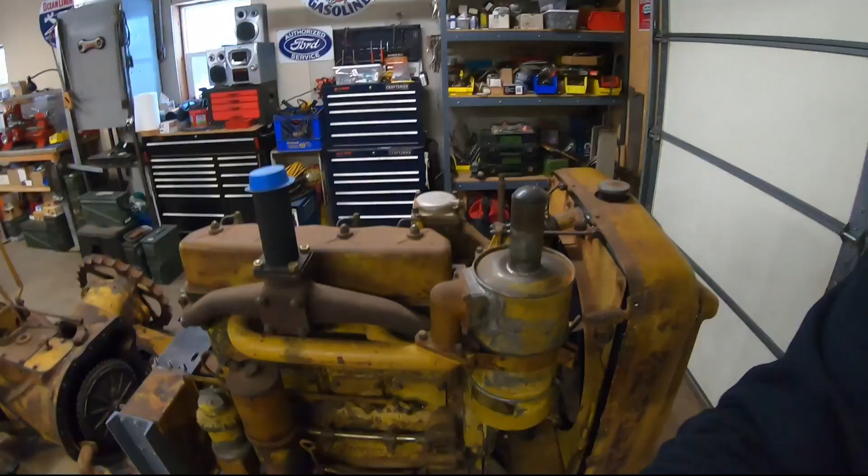We're going to put the starting engine on today. That's right. Finally going to get that done. You can see I've started loading some of the base studs in place. We have the 3 done over here, and I still have to do 3 over here.

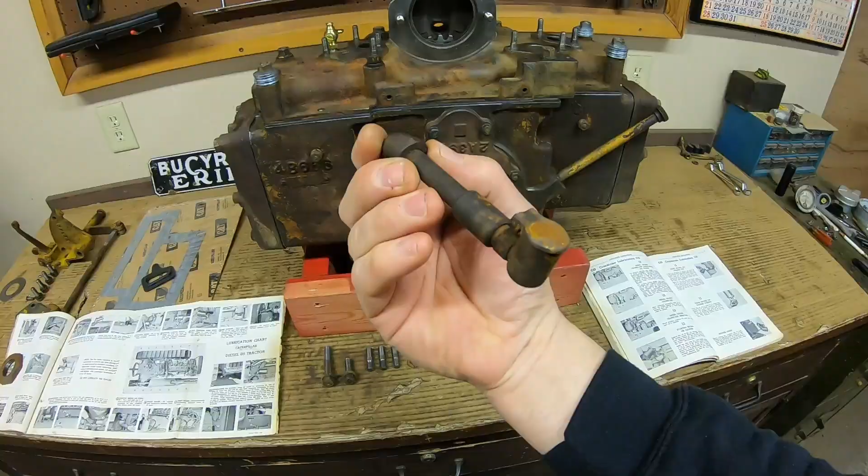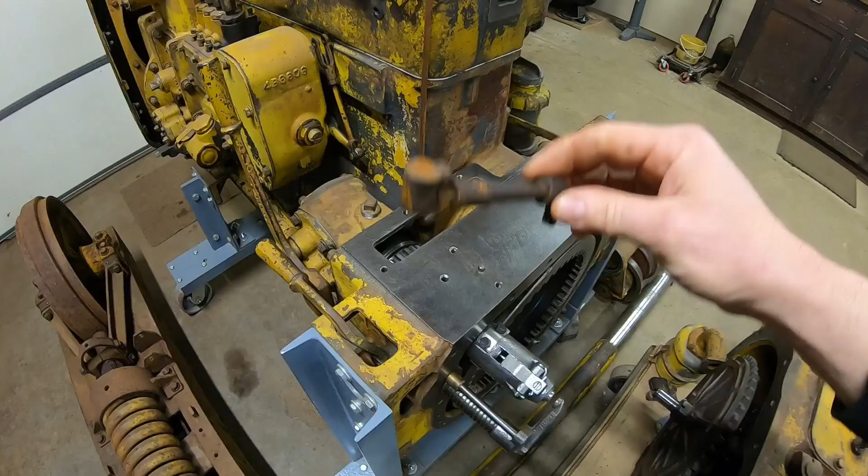But, well, before I can put the other 3 base studs into the bell housing, I have to address this detail item first. It's a really cool first generation piece. With 1113 being such an early tractor, it could have been eliminated through the years, but it was still in place. So it goes right in that open hole right there. And it's just an oil cup with some piping that is meant to carry oil to the pinion and ring gear where they mesh, lubricate, all that stuff.

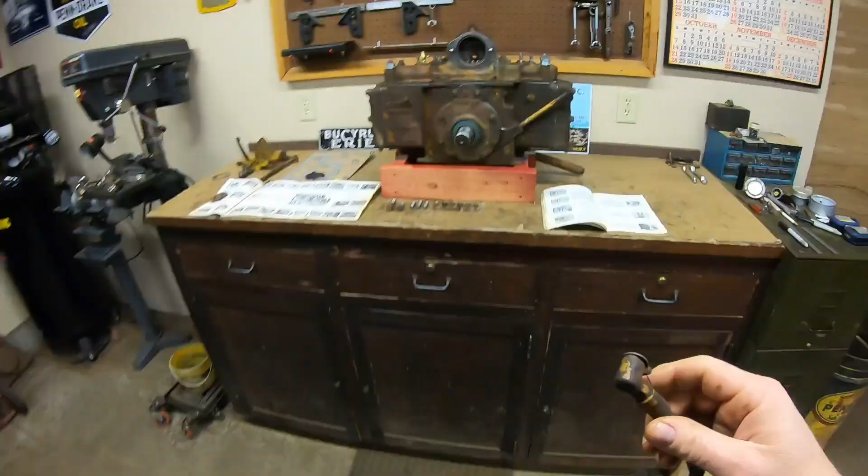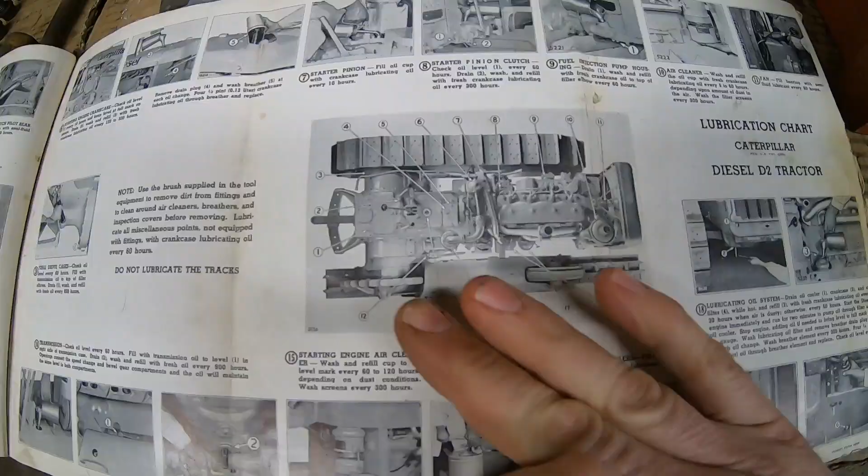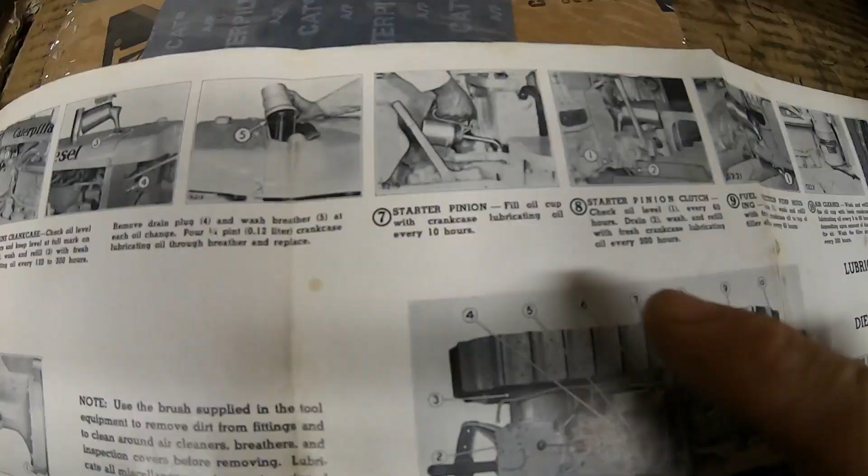And I'll show you in the manuals I have laid out on the bench here. Early Caterpillar D2, 3J1, 5J1, and up operator's manual right here. We have the full lubrication chart fold out. We have the overhead view of the machine. We want to look at item number 7, which is starter pinion. You can see that small little oil cup right there, maybe just at the base of the starting engine. It says, fill oil cup with crankcase lubricating oil every 10 hours. So that is the piece in question right here.

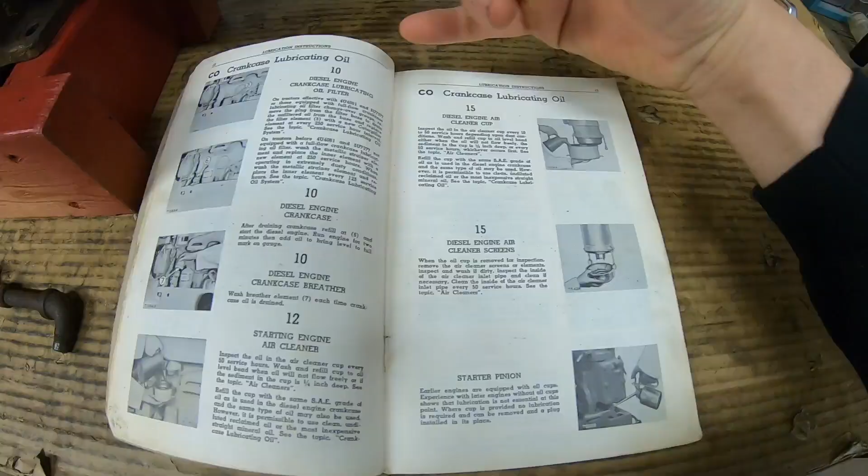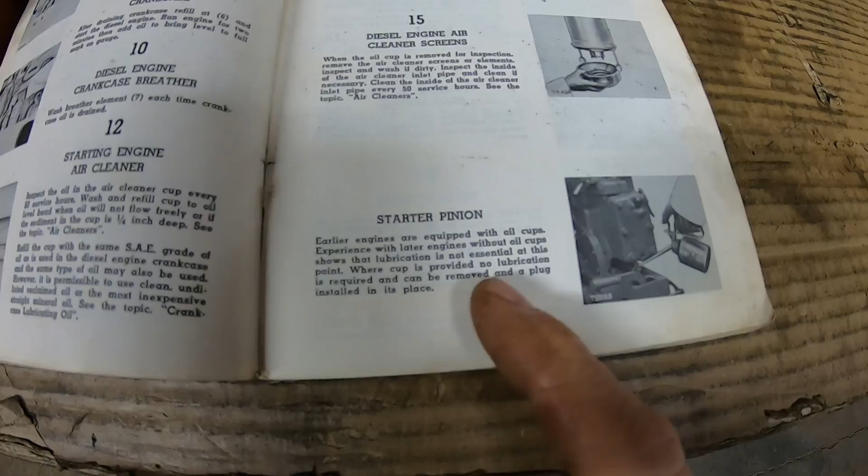What makes that such a cool piece to still have now, though, is when we go into the later Caterpillar D2 U-Series Operator's Manual, they don't even have an hour interval for it in here because, well, we just have a brief note, starter pinion. You can see we're adding oil to that little cup with the piping and everything down there. And it just says, earlier engines are equipped with oil cups. Experience with later engines without oil cups shows that lubrication is not essential at this point. Where cup is provided, no lubrication is required and can be removed and a plug installed in its place.

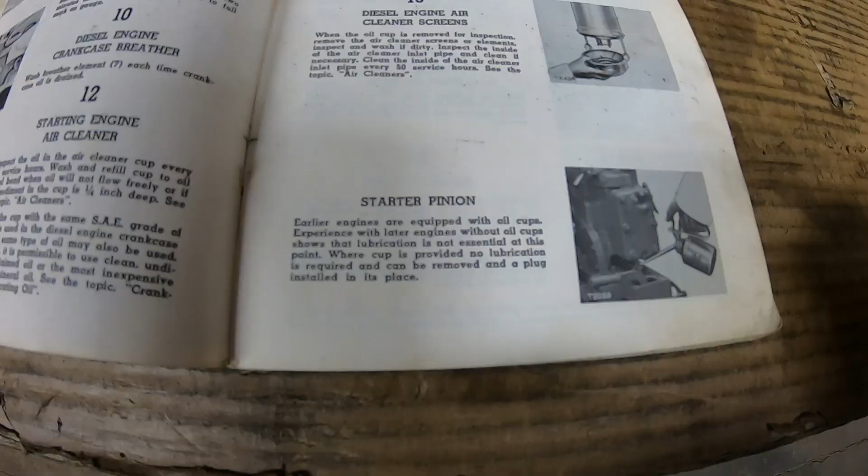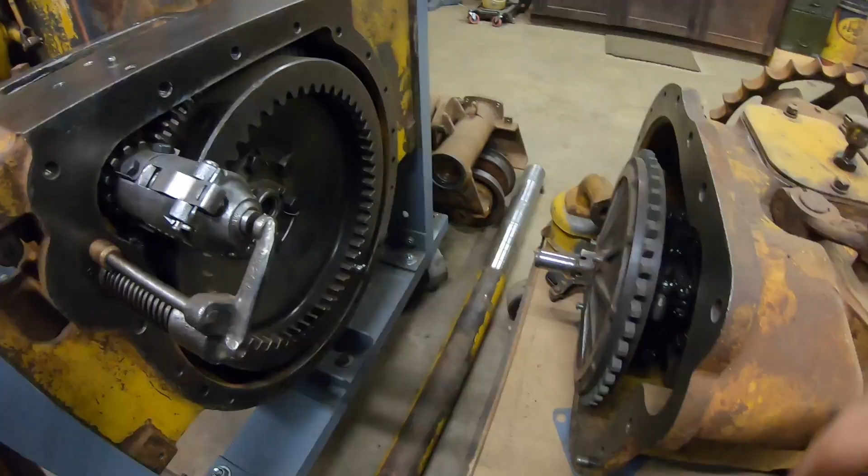So, do you think for a minute I'm going to just eliminate this with a pipe plug? No. We're keeping that in place, but at the same time, I'm also not going to be adding any oil to it because, well, we have the clutch in the flywheel in the same compartment, all the dust being generated from that, and to make a long story short, they learned that having all that oil on all those gear teeth just made more debris stick to them, and those gears ran dirtier with oil on them and wore out faster than if they would have just left them dry. So yeah, we're going to let them run dry, of course, but we need to have something there too.

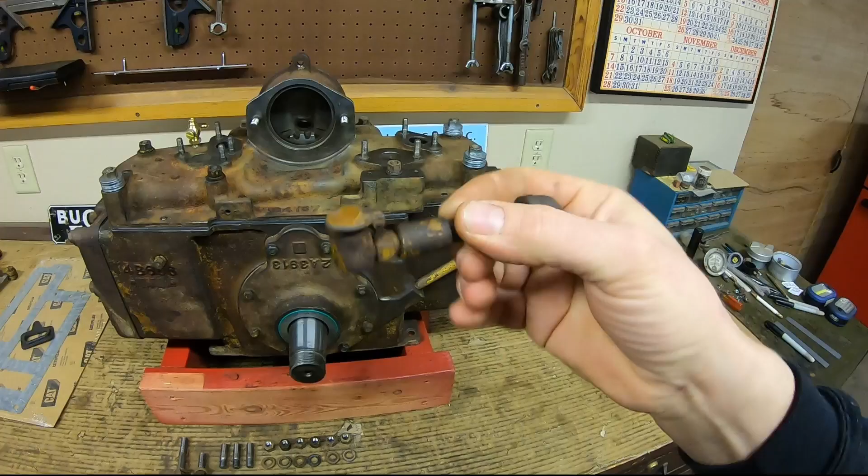And everything was moving along great until I went to clean it out, and I opened the cap just a little too far, and because that spring is rusty, it broke. So now that cap just flops. Oh, darn it. Of course, it was really rusty and poor condition, so it's best that it breaks now. We can do something about it. So, all right. So, we'll do what any other rational person would do.

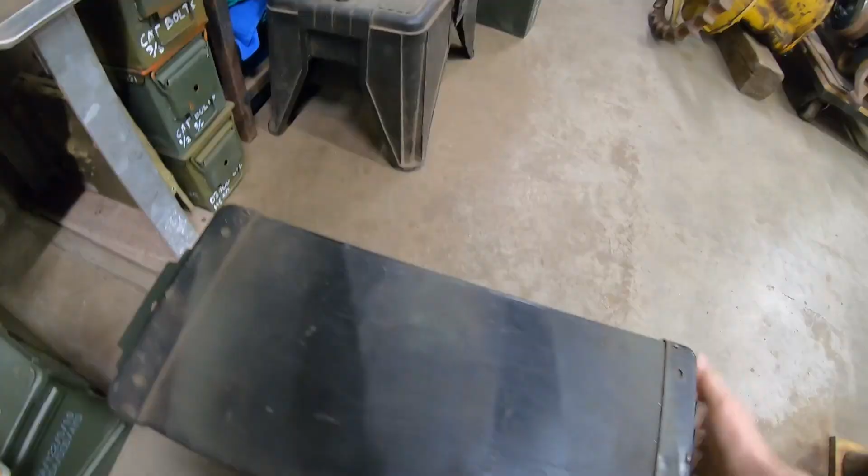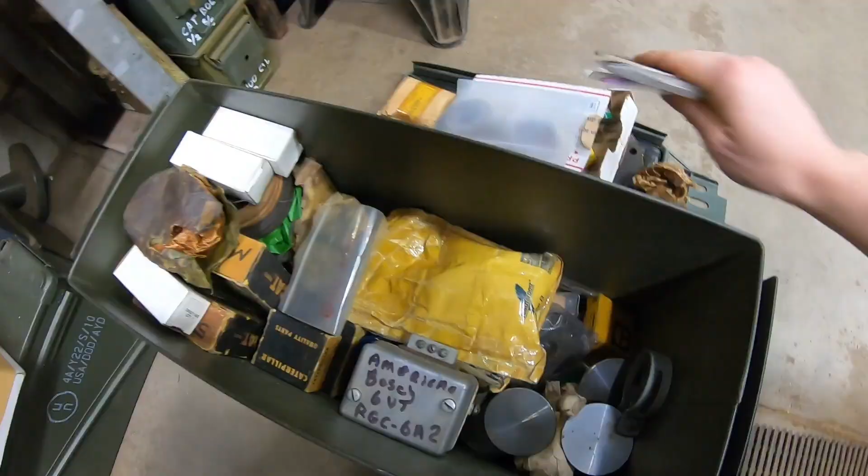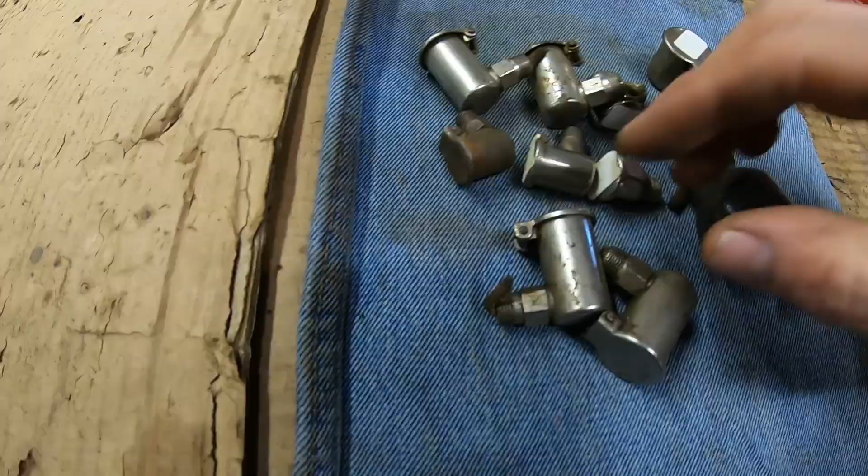Bust into our new old stock stash. Might have to dig down a little bit, find it. Nope. Not in there. Not in there. There we go. See if we can find a new one. Yeah.

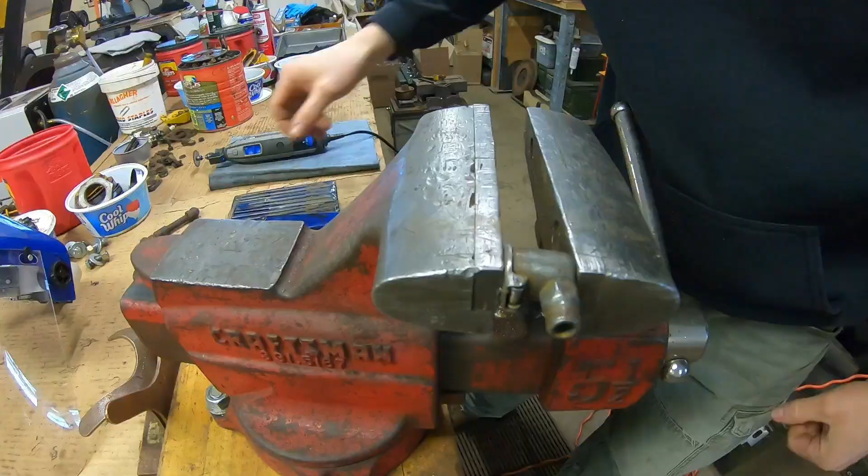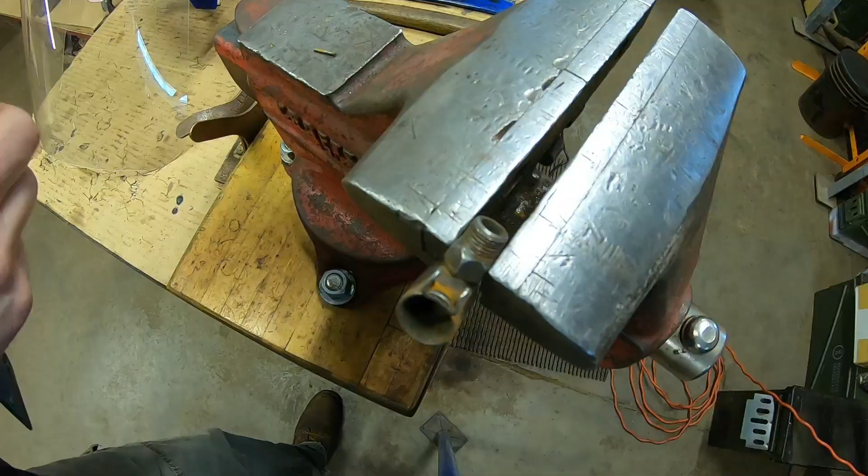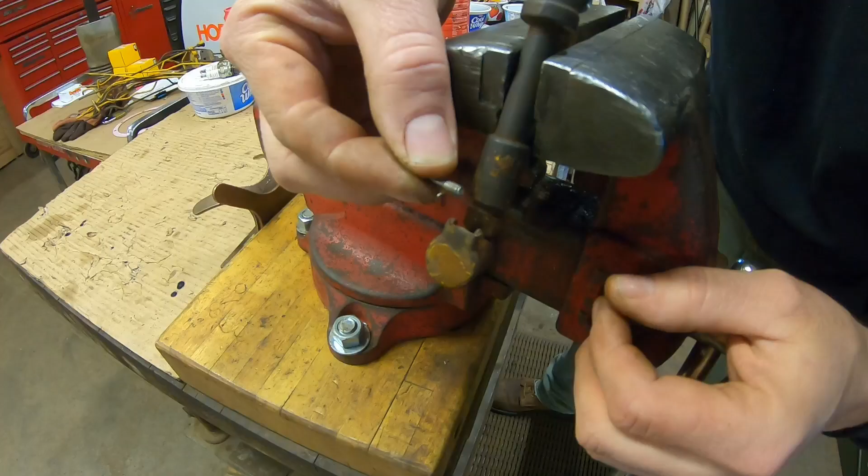Dremel off the peened over end of the pin. Pull it out. Get the spring. Do the same to the old one. There's part of the spring. There's the other half. Old cap back on the old cup. Drop the spring in place. Compress it. And because you were careful with the Dremel, you've got just enough of the old pin left to reuse again.

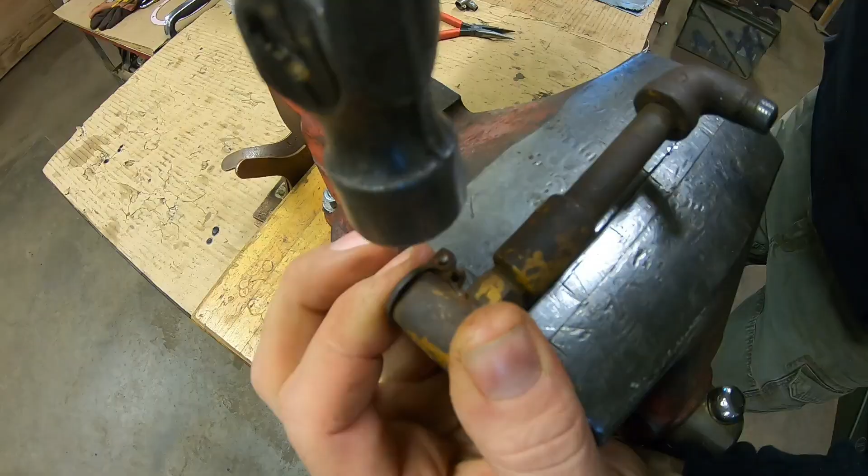There, peening the end of it over so it can't drift out. Return triumphantly to the bell housing. Start the threads. Achieve final position and verify the auto closing nature of the cap with patina still intact. As I said, like any other rational person would do, right? I mean, we worked harder to save this.

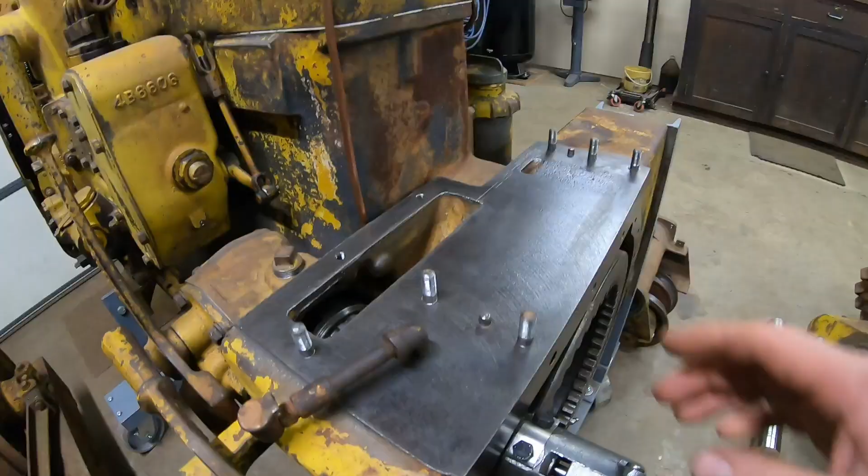All right, now that we don't have to spin this around and around anymore, I got the other 3 base studs put in. And guys, Squatch is going to get a little bit preachy right here, but you definitely want to chase these threads on the studs, on the nuts that go onto them. Anything that has to do, well, I chase threads for everything anyway, but anything that has to do, especially with these starting engine bases, good clean threads is a must,

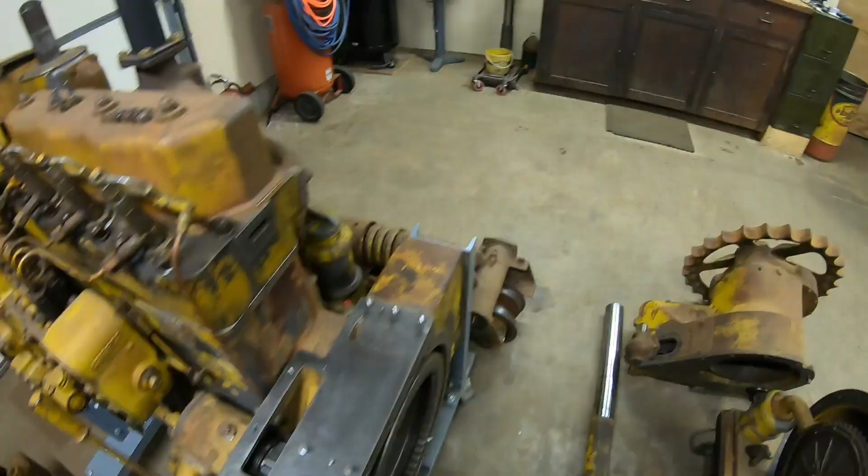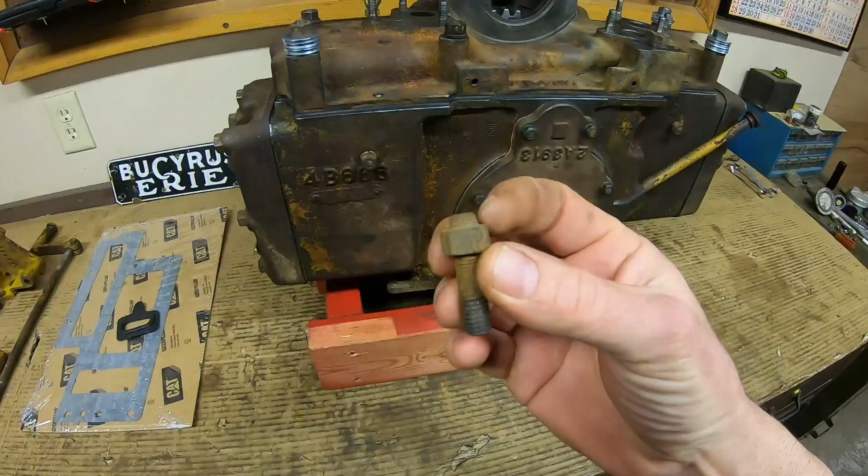because once you get this set on there, you're going to be working underneath the cylinders and the water jackets, and having this first generation oil cup with piping and everything that I'm so proud of, that's going to even further lock me out of this one for access. And you just really want to, I mean, taps and dies are not that expensive, and they can make life so much easier. So what happens a lot of times, and I've seen people struggle with it, you'll get a scenario like this where these things are old and rusty and the nut will stay on the stud.

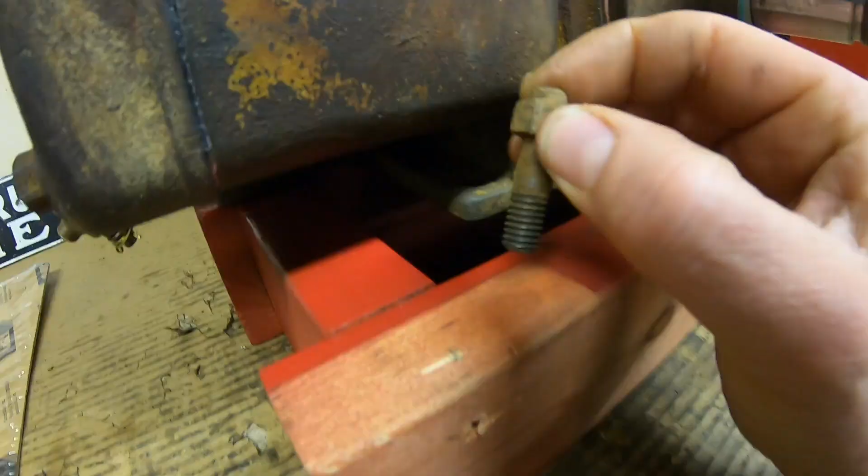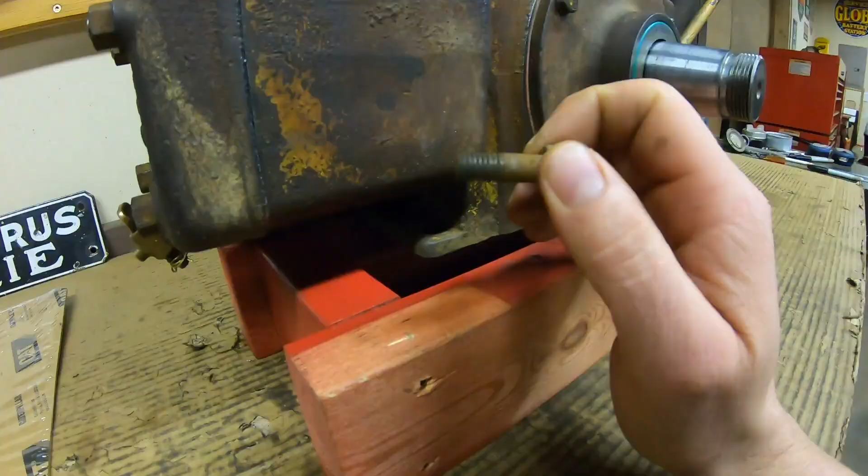And when you go to loosen this, working in underneath here, the stud will turn out of the bell housing, but the nut and everything is on it. And because it's so tight under here, it'll stay captured in the bolt hole and you can't get it out. And I've actually seen guys clean the whole base and everything and leave that in there, and then when they set this back down, they're trying to start those coarse threads back into the bell housing, and then they're fighting everything. Just take the time to get that rusted nut off the stud, even if you got to cut the stud to get it out, and start over with fresh, better hardware. I'm telling you guys, it's going to save you time and save you hassle in the long run.

And like I said, taps and dies are just such an essential part of the toolkit when working on these old machines, because when you have good clean threads, and you're going to see once I set that on, it's going to be real tough to get to this one. It's going to be tough to get to all 3 of those. All I need to do is start that nut, and then I can just go zing, zing, zing with like a fingertip, and it'll walk all the way down those threads until it hits the lock washer. And the only time I need to put a wrench on it is to compress the lock washer and get it tight against that base. So I got my rant out of the way.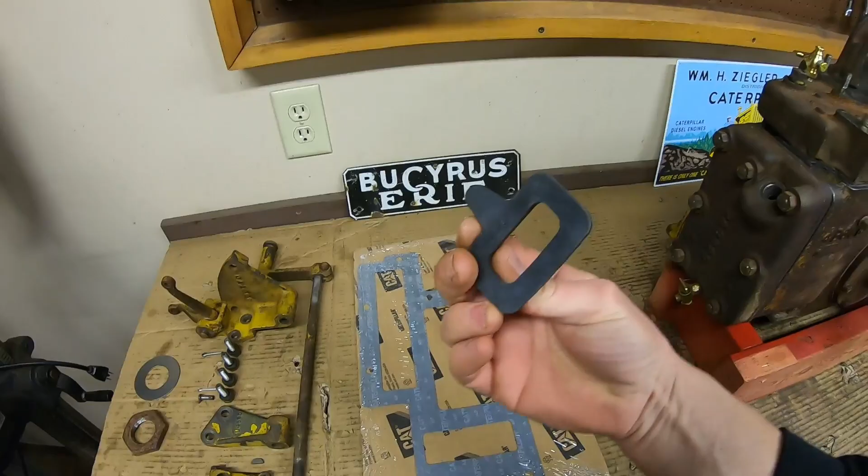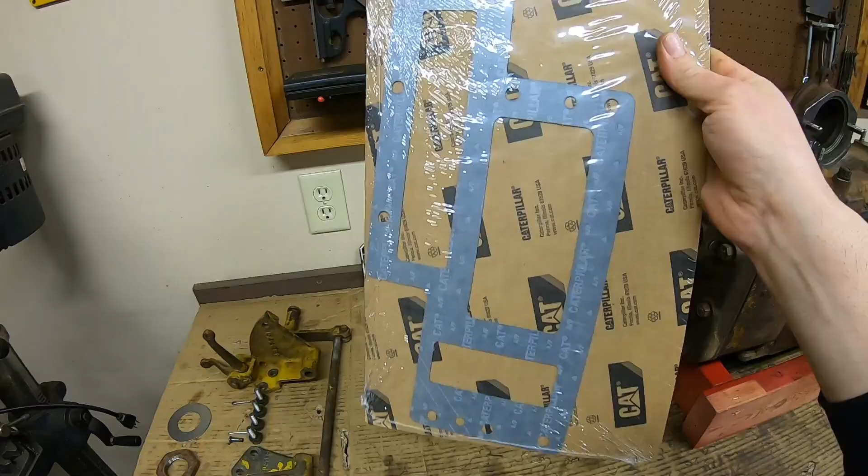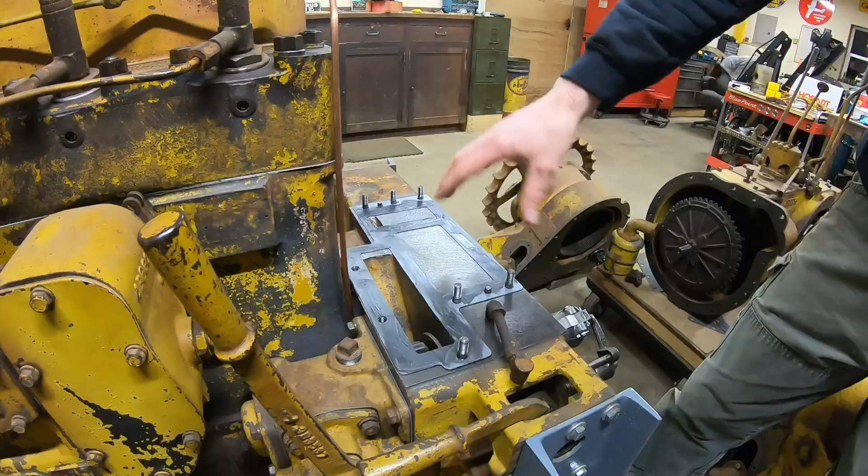Gasket time. You all are familiar with the top water outlet seal. We covered that last time. I did buy a new base gasket from Cat, even though I could have made it, and I can't even pick it up. Look at that. So anyhow, this is the new base gasket right here. Part number's 2A3483. Okay, everybody, get ready for some entertainment value here, because I've got the gasket in place. I've got goop on it because it's really heartbreaking when you have a coolant leak from that base. You just don't want to have to mess with any of that. So we've got that done. I also back up that rubber seal up here at the water outlet with some sealer as well.

But when I set the starting engine on, I'm here by myself. I don't have any help. So sometimes if you stack that idler gear tooth for tooth on top of the pinion clutch drum, pinion drive drum in here, then you have some trouble until you can get in here like with your leg and actually rotate that a little bit to get the mesh right, to get it to drop down. And then once it's on, I'll kick it back a little bit and then get that rubber seal put in there. Got a putty knife here for some help just in case. This is the only vantage point you're going to get of this, because it's just one of those jobs.

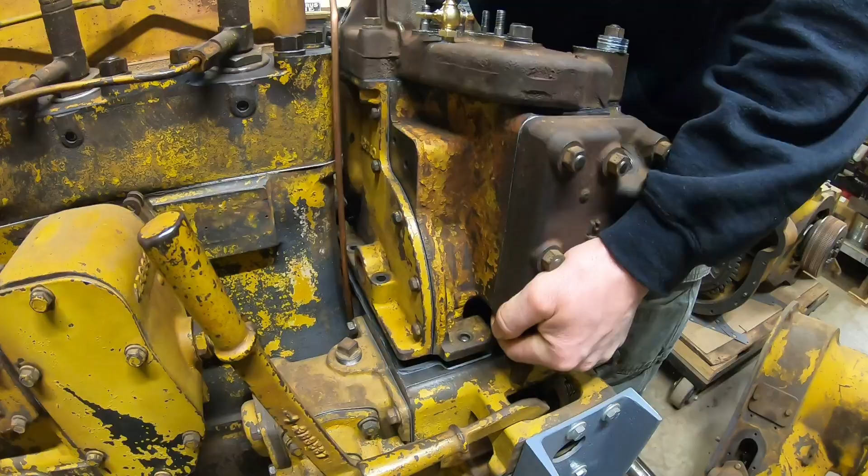And I really just want to guide that drain tube down right so we don't break it. Look at that, idler gear meshed up on the first try. Now we fight that water seal.

If you want to lend some moral support, you can say some bad words for me. I won't hold it against you.

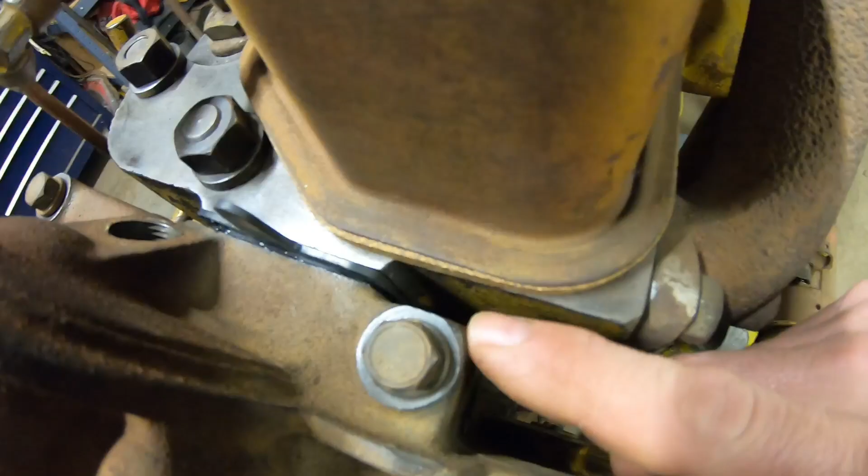Okay. Is that in? It's so hard to tell when these are popped in. I think it's in the groove. I mean, it's looking good all the way around. Yep, we're doing it. All right, I'll give you a better view of what I was looking at up here. I'm like 73% sure that's in where it needs to be.

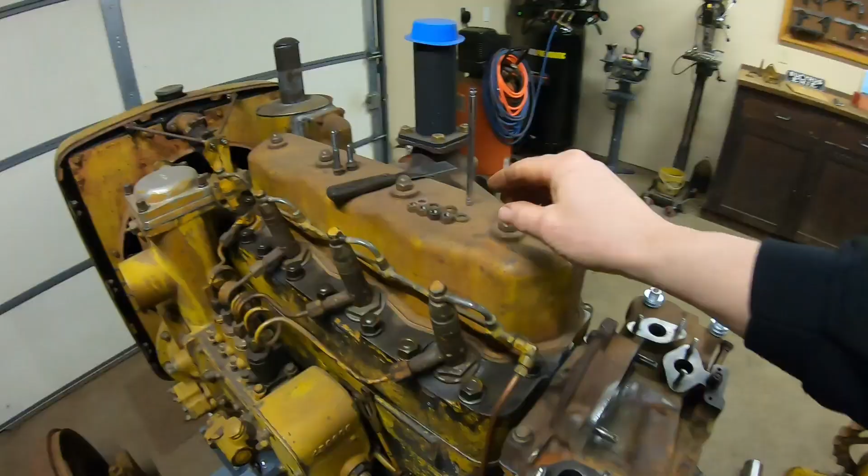So yeah, got the most difficult nut started down here way back in the corner. That's what I was telling you about. So hear that? Boom, against the lock washer. That easy. That's why you clean threads. The rest of the hardware is up here. Everything else is fairly simple after you get done with that one.

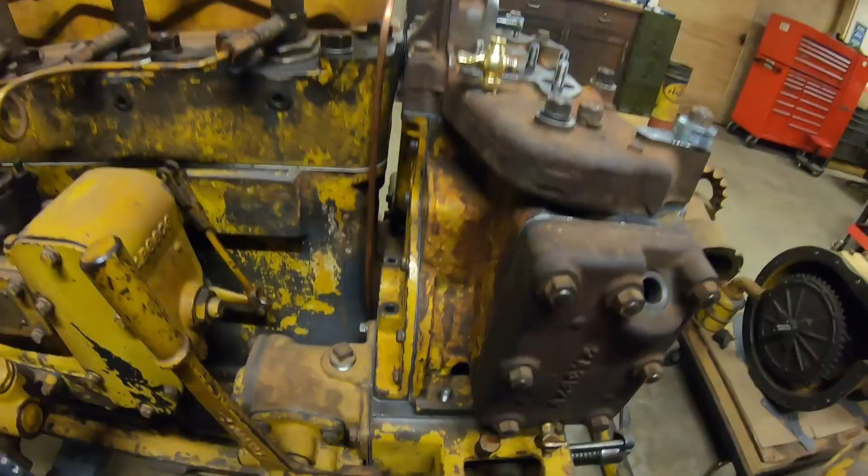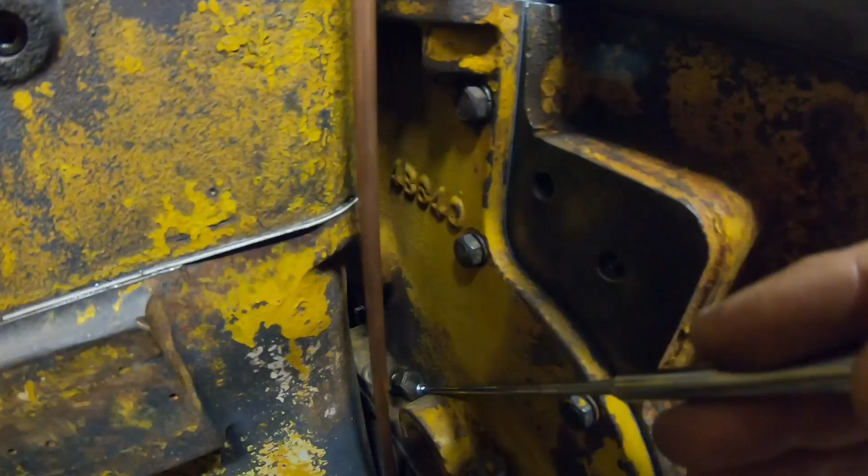Easiest one of the whole batch right here. And then we have this longer bolt goes right here. And the one that's most often overlooked, that one that goes all the way back in back there. I'll cheat and use a magnet since I am holding the camera with one hand. There we go.

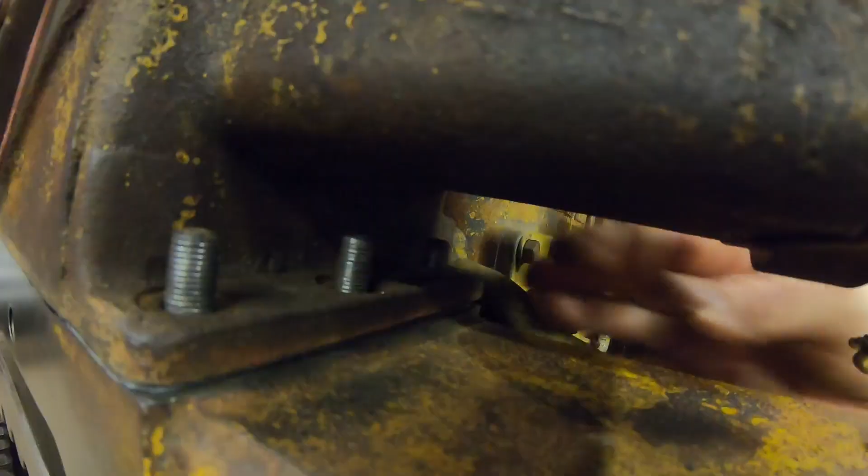Lock washer down. Nut started. Run down. Lock washer. Start the nut, come on. I should just work from out here. It's going to block the camera view, but it's a little bit easier to reach.

Some people really don't like these. Personally, I don't mind them at all because you're talking to a guy that knows what it's like to remove the cab of a truck from the chassis just to be able to work on the engine. So there's not much on these old D2s that bothers me at all. All right, third and final. Not too bad. Boom.

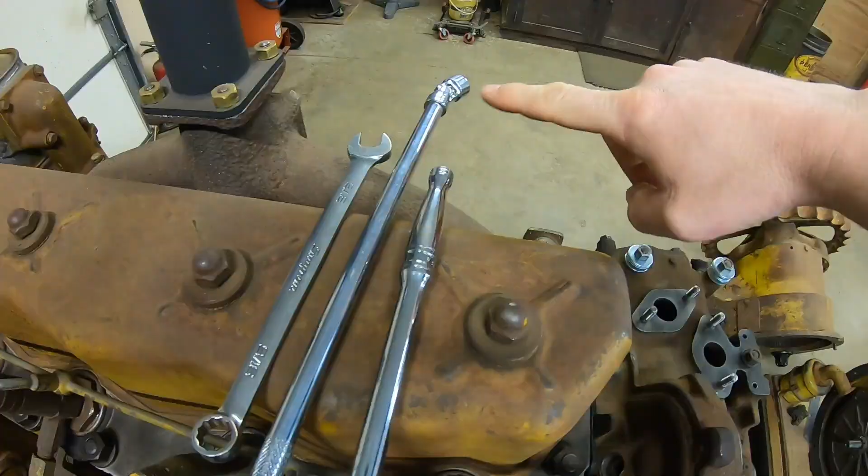All right, off camera, I got all of the base nuts and bolts tightened down. Tools of the trade right there. A swivel socket with a long extension is pretty much a must for that one way back there. So we should be all well and good with that.

Next up, I'm going to put the flywheel on. And yeah, it sticks down quite a ways, but luckily Cat had the foresight to cut a relief in that bell housing flange so that it will clear the flywheel as the transmission is going up to the engine. So that's good.

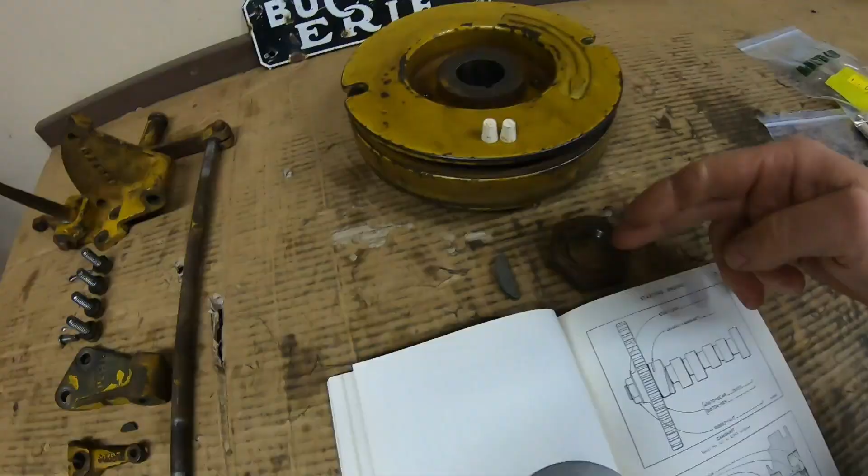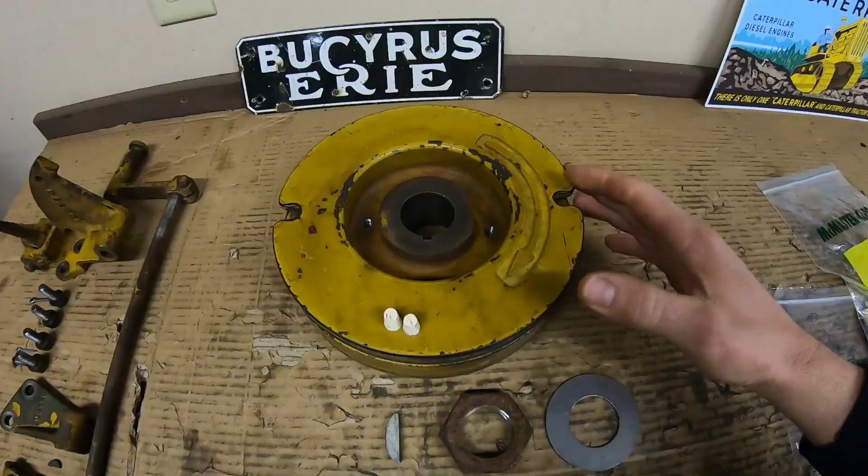Anyhow, once again, my favorite online store, McMaster-Carr. I've got to the point where I buy these corks in packs of 100 at a time, all different sizes. I've found that that's about 30% of the cost of me going to my local hardware store and cleaning out their bin, because I always buy way more corks than the average person. And then they're like, oh, we'll have some more next week. So then I come back next week and then we're all good because you use a lot of them.

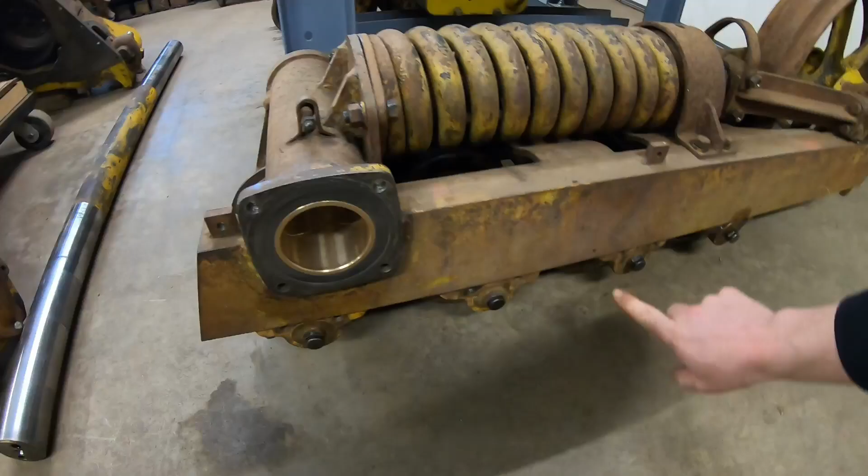I mean, there's going to be 16 threaded holes I'm going to have to plug in all of these track roller caps. I also end up corking like this opening here where that dowel hole is, where the retention cup is, just to keep dirt and everything from getting in. When you go through Caterpillars, you use a lot of corks, and 100 of one size sounds like a lot. They actually don't take you very far.

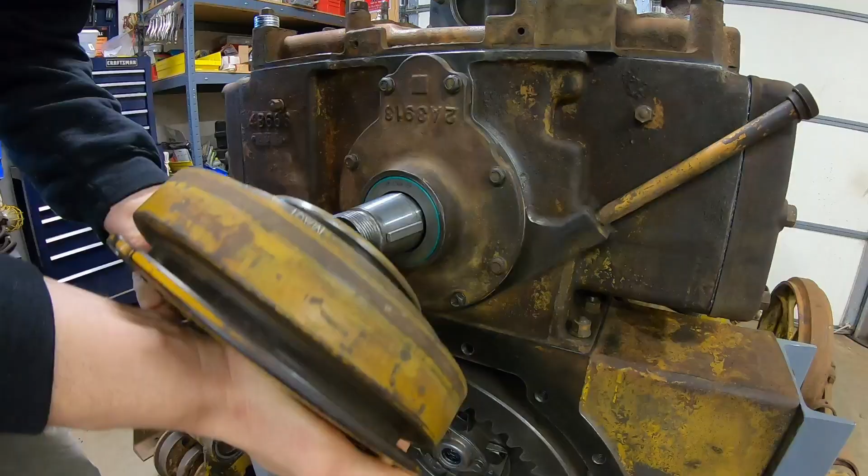I got the key in place on the crankshaft. Don't worry a bit that the flywheel is more yellow than the engine, because when the dash is on, the flywheel is all you see anyhow.

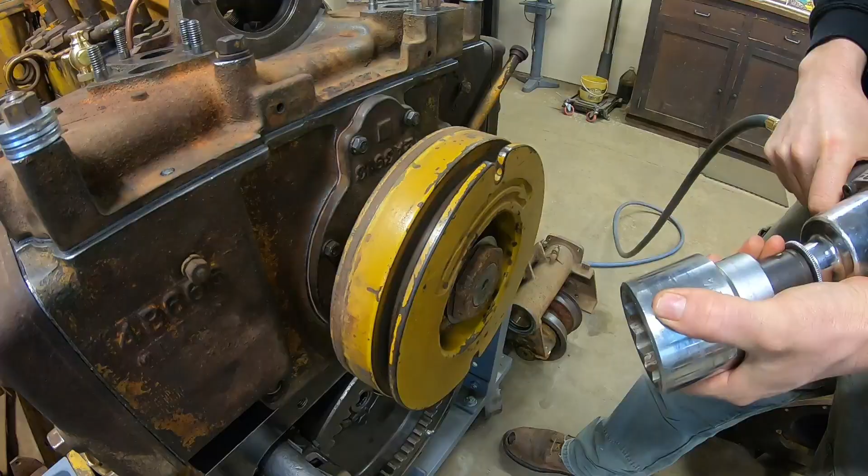Folding the lock now, this is a pretty simple one. There's a flat on the pulley hub up here. You just bend the upper portion of the lock down onto that flat and then just pick any one of the 6 sides of the nut to fold up onto from there.

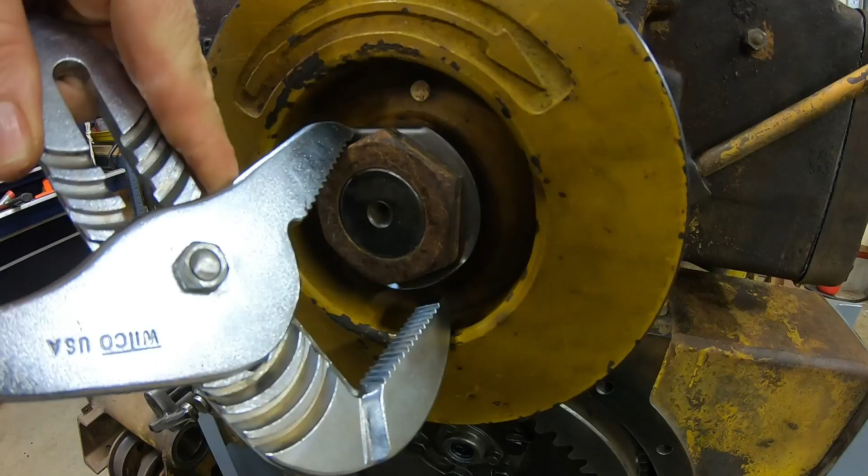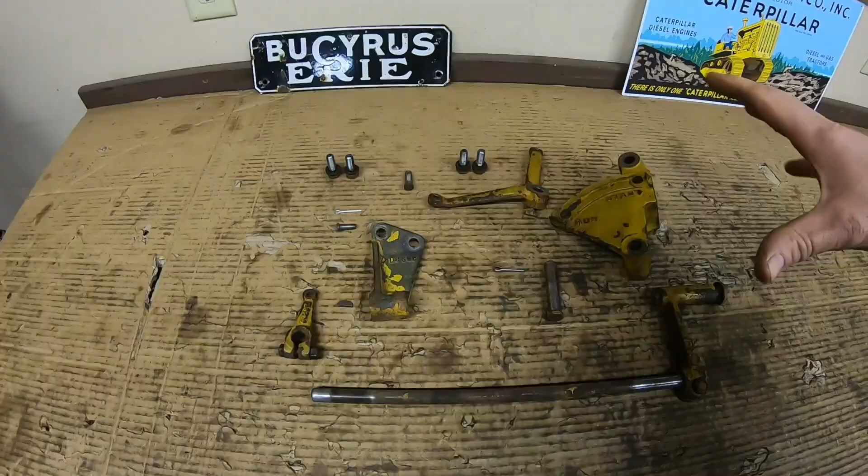Okay, flywheel's on, permanent. So the last thing on the list for today is an assortment of compression release and throttle pivot linkages. So we'll get all this stuff together, and then we'll finally have a clean bench, and I can replace this really dirty cardboard. This stuff's been on here for so long, it's starting to get nasty, but I've had 3 engines on here for months and months. So looking forward to a fresh start.

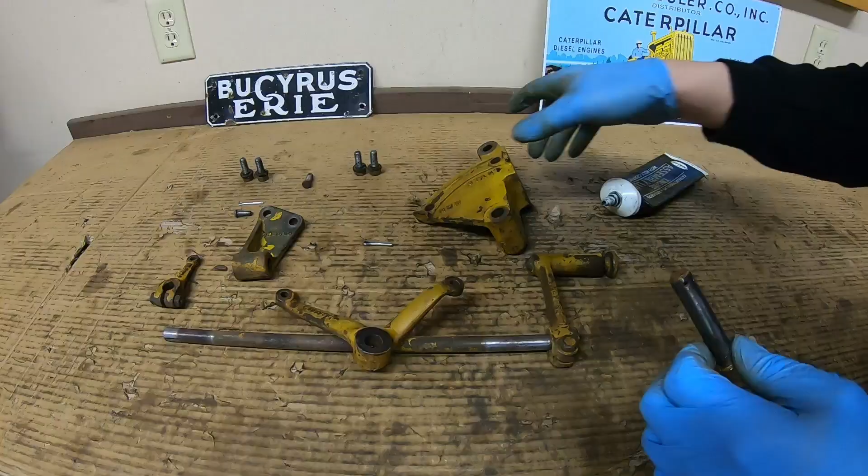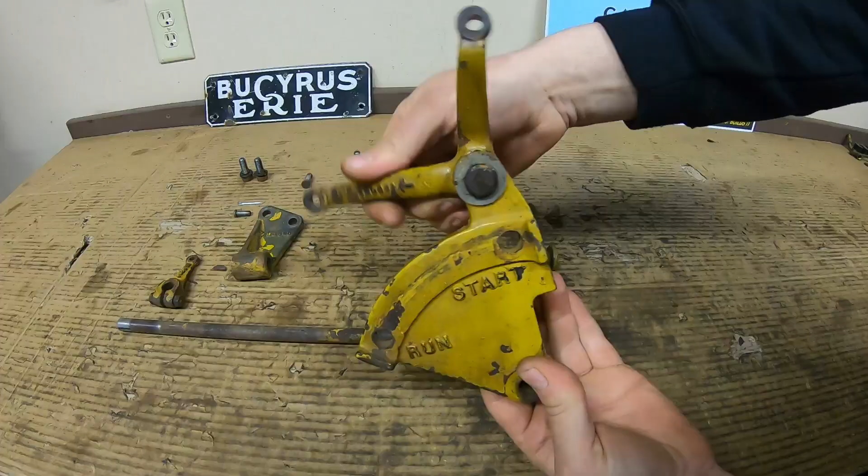All right, just getting a little bit of lubrication on some of the pivot points here. So first thing I'm going to do is assemble this throttle pivot lever onto the bracket. It just pins on. Cotter pinned in place. Yep, pivots well. So next we take the lever with the rod and slide it into the bracket. There we are. And we pick 2 of these bolts and go over to the engine.

The rod goes between the starting engine and diesel engine, and the bracket bolts to the starting engine block right about there. And these bolts get sealant on the threads because these are open holes into the valve compartments of the starting engine. So these early 4B blocks are like that. The later 5F blocks, those are blind holes. So you don't have to worry so much about sealing those threads.

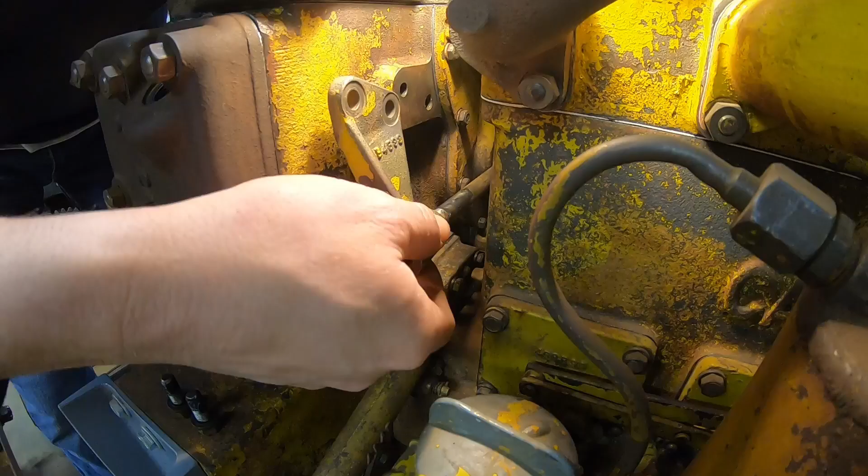There, everything's just hand tight for now until we get the other side secured. On the other side now, we put the bracket on this end of the rod. And again, sealer on the bolt threads. Now with everything in line and the rod pivoting smoothly, we can tighten the 4 bolts.

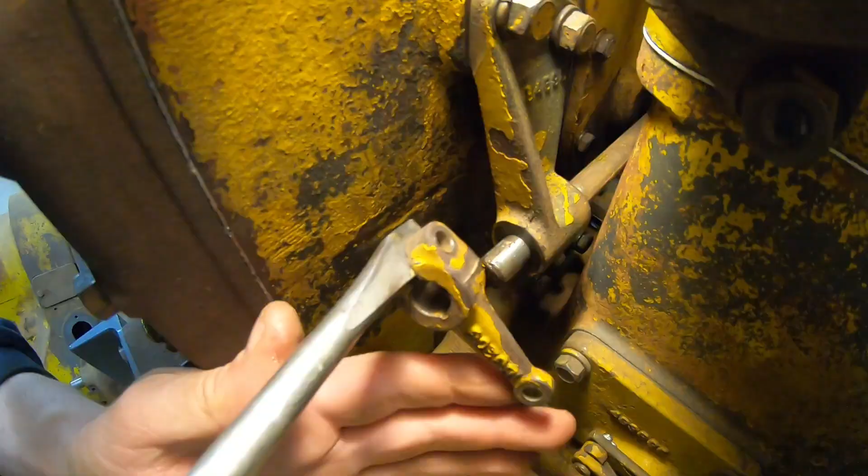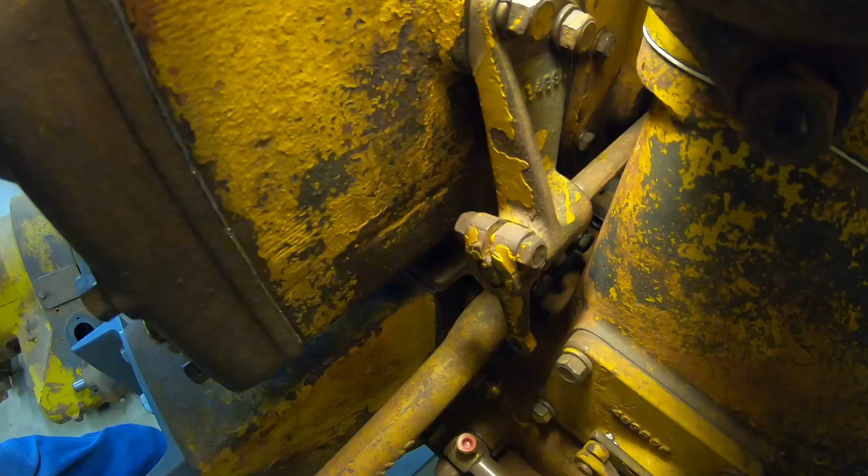Next, this tiny little woodruff key goes into a slot on the bottom of the rod. Now this small lever goes on. It helps a lot to spread that a little bit with a wedge. I've got a large screwdriver acting as a wedge right now. That's also why we put the woodruff key in down there. That locates it. And we'll secure it in place with the pinch bolt. And finally, pin it up to the rest of the compression release linkage.

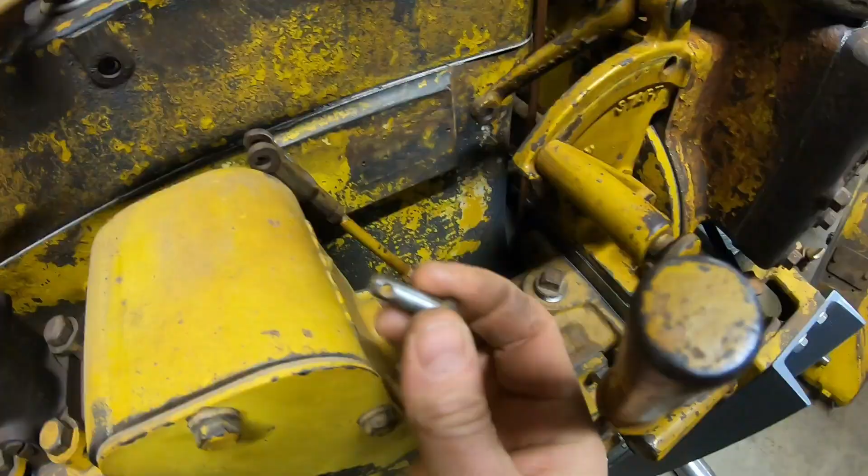Back to the other side, final piece now. We'll attempt the one-handed trick shot here because I decided I didn't want to mess with that pole to put the camera on. All right, line it in for the throttle linkage. Boom, we'll put the cotter pin in later because I can't do that with one hand for sure, but that's doing what it needs to.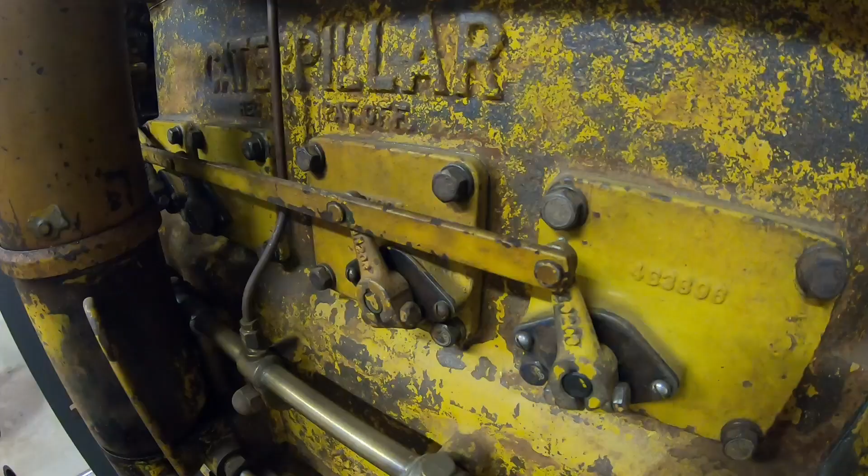So test out the compression release. We're in the run position right now, so to open those intake valves, we'll move the lever up to start. We have the spring-loaded plunger on there, so watch what happens to the linkage on the other side when I move this to start. And back to run. That moves very well.

Let's just take a second to admire it. That's right, starting engine is in place. So I like how it looks on there. And so far I like how everything is fitting and working. Speaking of fitting and working, here's another instance. Well, I should say I got the new petcock in there for that air vent. And yeah, that's excellent fit.

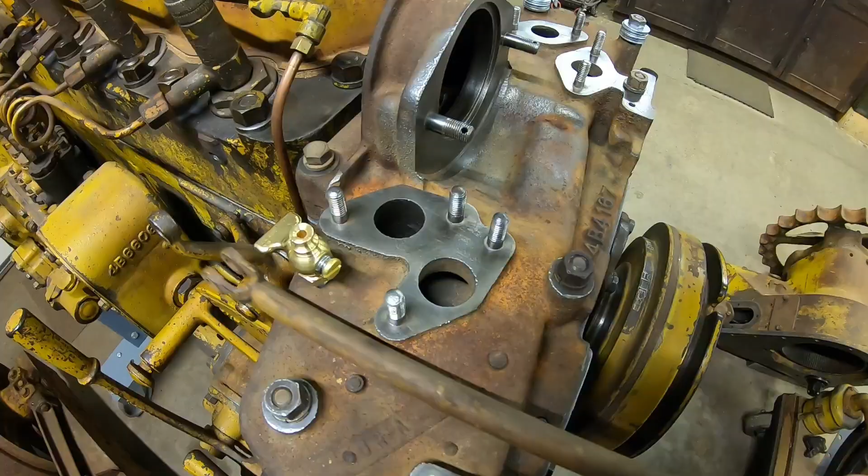And another reason why you do want to locate this properly is because now that you can see some of this throttle governor linkage is in place, we'll just put the rod up here that goes up to the throttle lever and roughly put that where, there we are. You can see where that has to pass through this area of the top cover right there. So we definitely need to nestle that air bleed back behind these flanges enough that it's not going to impede that throttle linkage. So yeah, that's just part of getting everything placed where it needs to be. And when you do modifications, just try and do them properly.

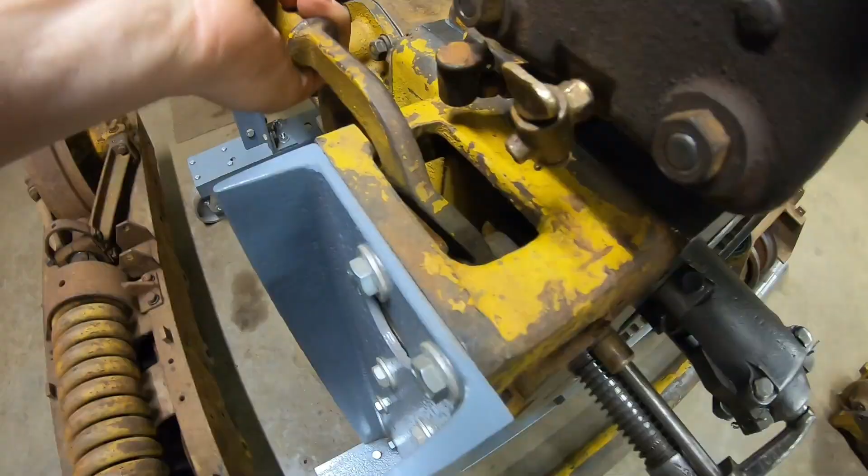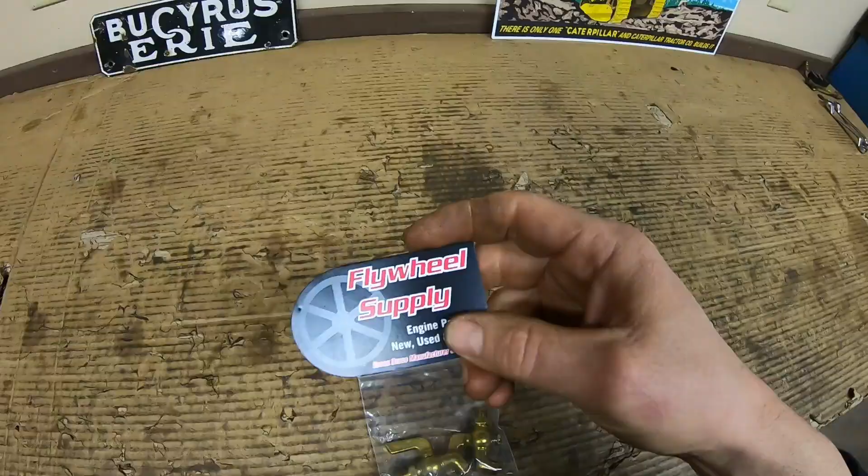Oh, one other thing too, I mentioned I got that new one. I also ordered 2 of the spout style spigots for the cylinder drains here. The trouble with this one on this side though, they're not going to fit, because when you raise this starting pinion lever all the way up, that spout is going to hit it. So yeah, it's too bad too, because I got them right here. Got them from Flywheel Supply, highly recommended. So yeah, there they are. Really good quality too, but trouble was they just don't fit. So, oh well, you win some, you lose some.

Anyhow, all right, we made some progress, but remember everybody, I know some of you are getting antsy to hear this stuff run, but this is another whole engine subsystem in itself, and we've got a lot of studs up here that still have to have things put onto them yet. So yeah, we've got exhaust, magneto, engine breather, carburetor, governor, all the control linkages. We need to sort the dash and the fuel tank to feed the carburetor. There's a long ways left to go before we can wrap rope on that flywheel.